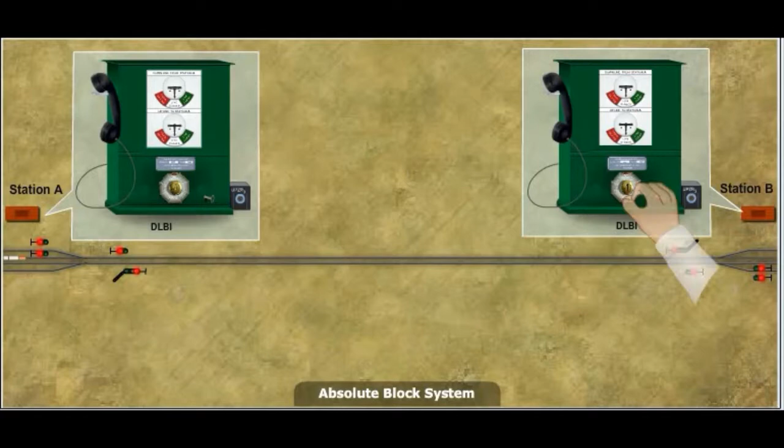Under absolute block system of working, no train shall be allowed to leave a block station unless line clear has been obtained from the block station in advance. On double line, line clear shall not be given unless the line is clear not only up to the first stop signal at which such line clear is given, but also for an adequate distance beyond it.

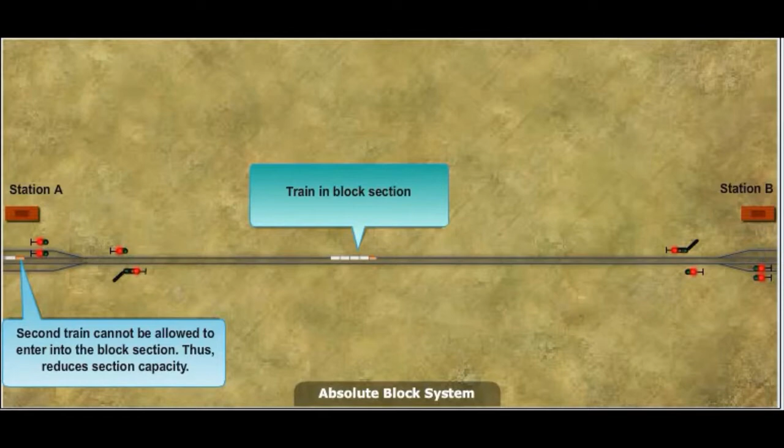In absolute block system of working, only one train can be allowed to enter into the block section. A second train can be sent only on clearance of the block section by the last preceding train. This affects the section capacity where the density of traffic is very heavy and the block section is the ruling block section, since trains take more time to clear the ruling block section.

Intermediate block signaling is a signaling arrangement on a double line section for increasing the section capacity by splitting a long double line section or ruling block section into two portions called the rear section and advance section. It is a substitute to C-class station working. So, to increase the section capacity to meet the traffic demand, the ruling block section or long block section on double line is divided into two portions with IBS arrangement. Intermediate block signaling exists only on double line sections.

Intermediate block signaling is a replacement to C-class station because of the following advantages. Block instruments are not required. Station master and operating staff are not required. Station building is not required. Section capacity is further increased.

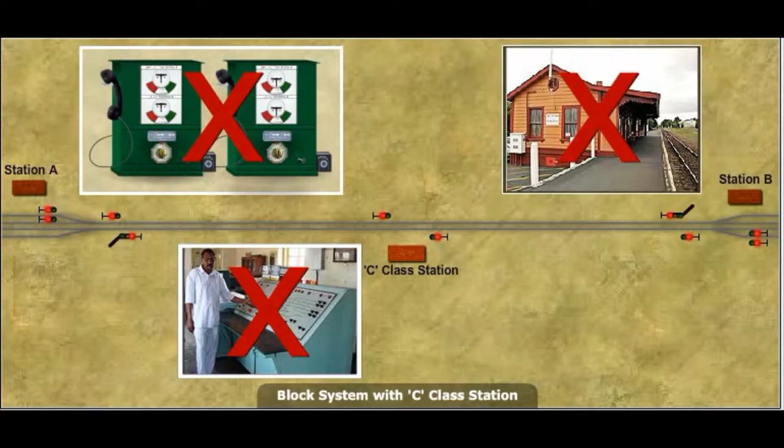IBS splits the long block section between the two stations into two sections: the rear section, also known as the axle counter section, and the advance section. With intermediate block signaling arrangement, two trains can run in the section between two adjacent stations following all the conditions required for absolute block system. The purpose of intermediate block signaling is to increase the section capacity.

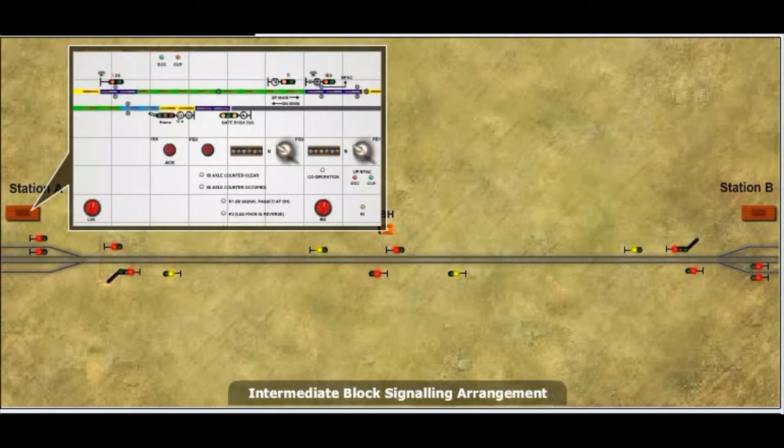Axle counters with resetting arrangement are provided for the rear section in each direction. The axle counter used may be a universal axle counter or a single section digital axle counter. Each block station has an IBS panel with various indications and push buttons. IB signal, IB distant signal and IB inner distant signal are used as per the section requirement for each up and down direction. For convenience, only one distant signal will be shown hereafter.

Each block station has a conventional double-line block instrument. IBS is interlocked with line clear obtained with this double-line block instrument in the rear station. Magneto telephone communication is provided from up and down IB signals to the respective stations at rear for communication between the loco pilot and station master in rear in case of IB signal at on for more than 5 minutes.

The rear section is the section between the last stop signal and the intermediate block signal, including 180 meters of block overlap beyond the intermediate block signal. Entry of a train into the rear section is controlled by the rear station last stop signal. The last stop signal is controlled by clearance of the axle counter section. Axle counter resetting arrangement for the rear section is kept available at the rear station in case of universal axle counter. With digital axle counter, they are available at both stations.

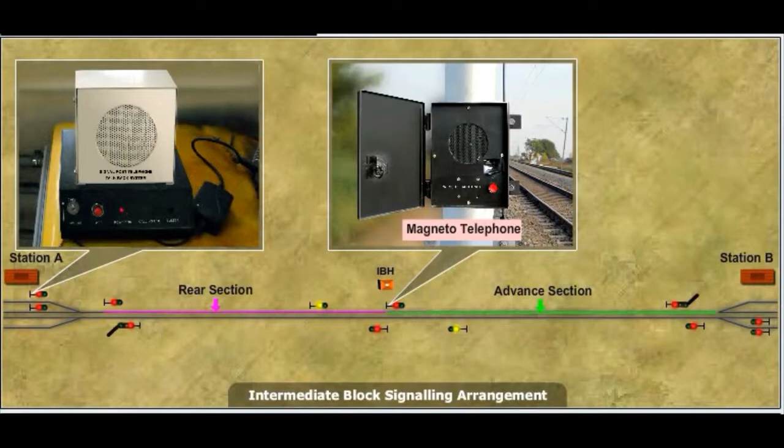Magnetotelephone is provided at intermediate block signal for communication with the station in rear in case IBS is found at danger for more than 5 minutes by the train loco pilot. The last stop signal at station A can be cleared if axle counter section is clear. In case of end cabin working, clearance of last stop signal also requires station master slide control.

Last stop signal will be replaced to on as soon as the train occupies first vehicle track circuit of last stop signal. When train goes beyond last stop signal and on occupation of LSS control track, last stop signal is replaced to on and K2 indication along with a bell will be displayed at station A operation place, either cabin or station, as a reminder to put back LSS lever or switch to normal.

The down intermediate block signal is controlled by a lever in station A or a signal switch or button on operating panel of station A, and also by the line clear received by station A from station B on the double line block instrument connected between them. On receiving line clear at station A, the intermediate block signal can be cleared. Once IBS is off, IB distant or inner distant signals also display their off aspects.

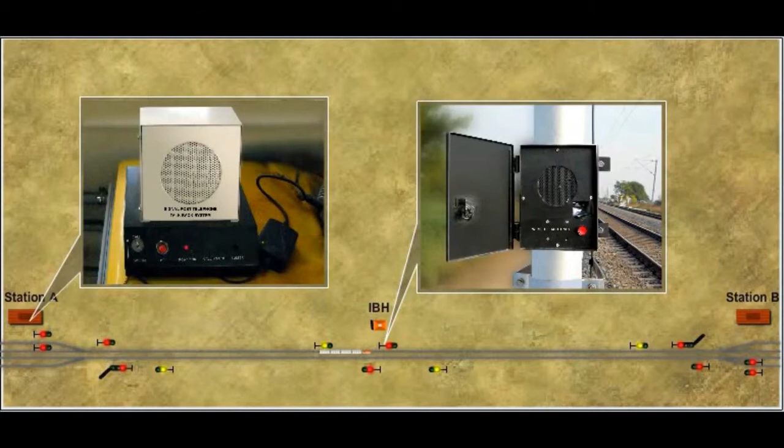Procedure to be followed by loco pilots in case of intermediate block signal at danger or blank. According to General Rules 3.75, intermediate block signal at danger or blank, the loco pilot has to wait for 5 minutes and contact on telephone provided on IB signal post with station master or operator in rear. If authorized by station A to pass the IB signal at danger on exchanging of private numbers, he can pass signal at danger and proceed to station B at normal sectional speed.

If communication is not possible after waiting for 5 minutes, he can go beyond IB signal at a speed of 15 km per hour if visibility is clear, or 8 km per hour in case of inadequate visibility, fog, night, etc. The loco pilot should proceed at restricted speed till he reaches station B and report failure to station master.

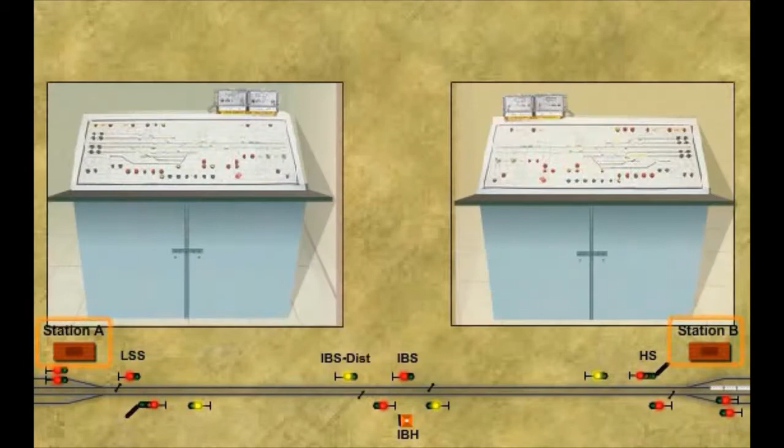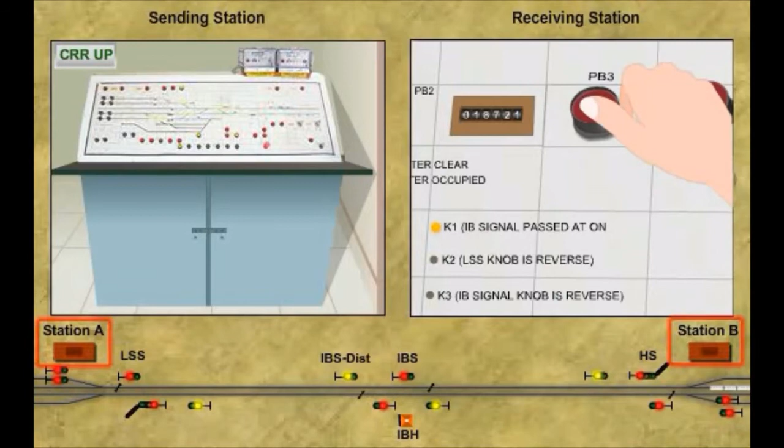Cooperation receiving relay, CRR. This relay picks up at sending station when PB3 button is pressed at the receiving station to cooperate with the sending station for cancelling either intermediate block signal passed at danger cancellation or axle counter cancellation in case of universal axle counter.

ACZNR. Train passing intermediate block signal at danger, cancellation button relay at sending station. ACZNR picks up at sending station when PB1 is pressed with ACZR down.

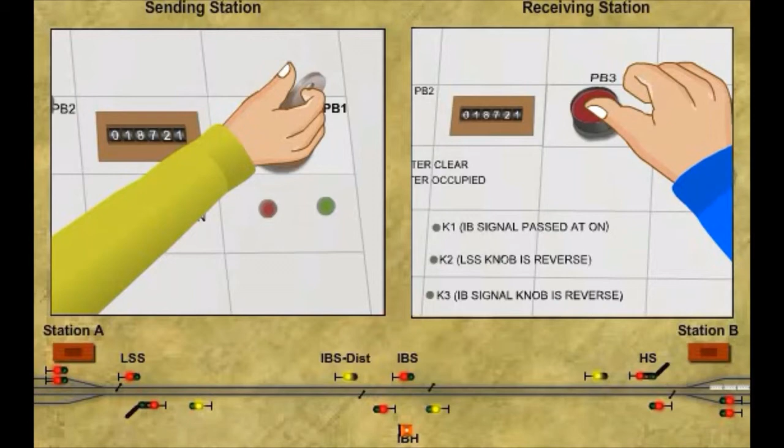Axle Counter Resetting Relay, ACRSR. This relay is used for resetting axle counter working. This relay is used with Universal Axle Counter for IBS. With SSDAC, this relay is not required. It is used whenever the axle counter shows occupation, even when there is no axle or vehicle left in the axle counter track portion.

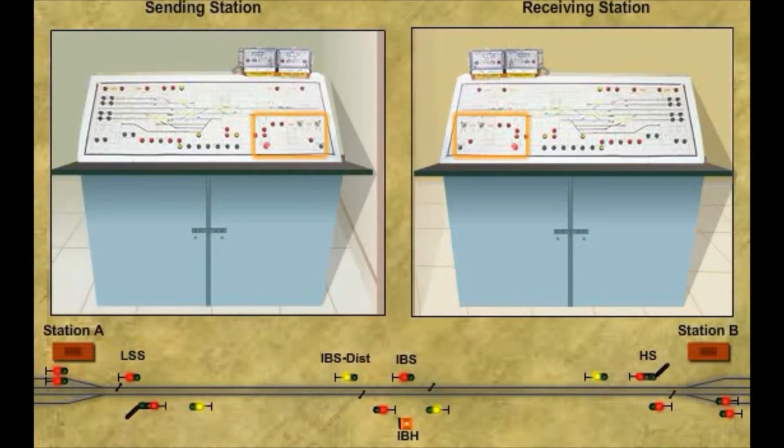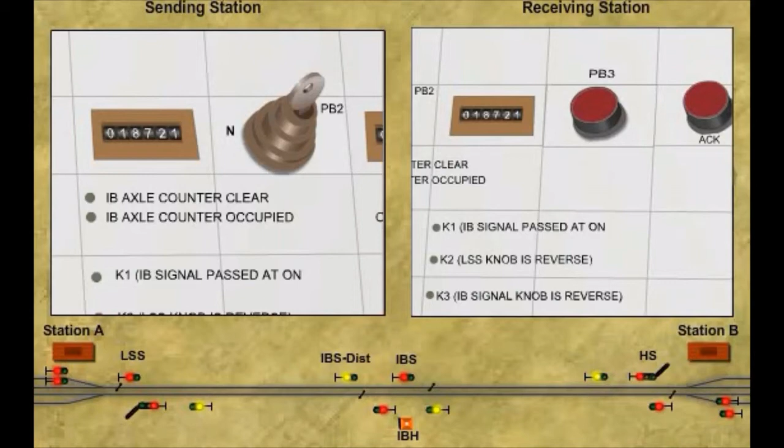It picks up when sending station presses PB2 and receiving station presses PB3 simultaneously. When ACRSR picks up, feed is extended to R relay inside the axle counter evaluator and resetting takes place.

Push button proving relay, PBPR. This relay is used for silencing the buzzer actuated when intermediate block signal is completely blank, and when intermediate block signal is passed at danger.

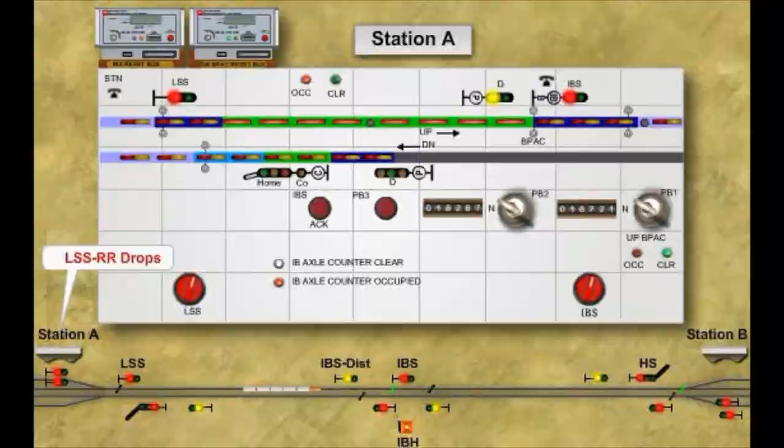LSS VPR, LSS section or rear section vital proving relay. When LSS section or rear section is clear of axles, LSS VPR relay picks up at both station A and station B. LSS VPR relay pickup is indicated by clear indication, green on the panel, and section clear indication, green on the IBS SSDAC reset box at both station A and station B.

Whenever the section is occupied, LSS VPR relay drops at both station A and station B. LSS VPR relay drop is indicated by occupied indication, red, and section occupied indication, red, on the IBS SSDAC reset box at both station A and station B.

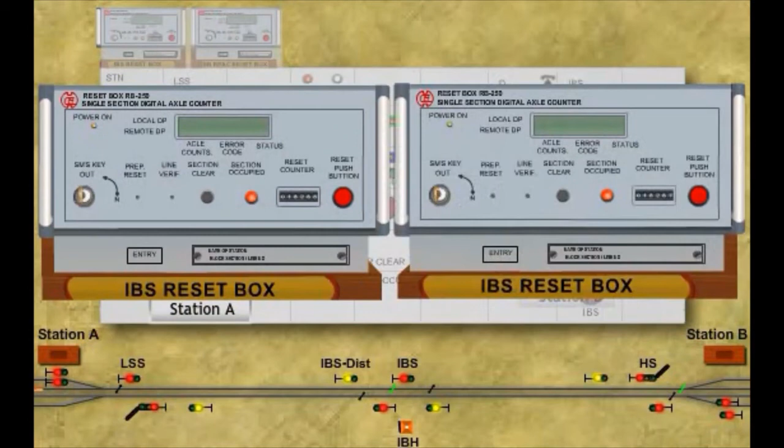LSS PPR, LSS section or rear section preparatory reset relay. This relay is normally down at station A and station B whenever the LSS section axle counter remains occupied and does not clear even when there are no axles left behind in the section. Axle counter has to be reset, and this is done by inserting SM key in the reset box, and key has to be turned along with pushing reset button.

After resetting is done by station masters at both stations, LSS PPR relay picks up after a time lapse of 12 seconds. When LSS PPR relay picks up, preparatory reset indication, yellow, appears on both SSDAC reset boxes as well as reset counter increases by 1 number.

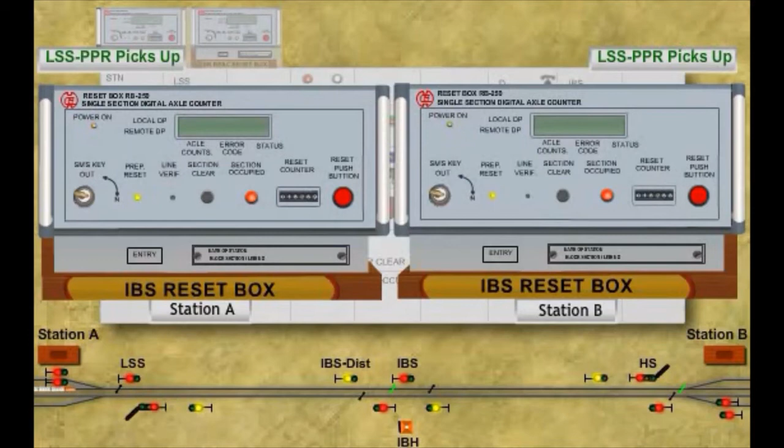Now, the next train has to be piloted out into the rear section as the axle counter was in preparatory reset mode. When this train enters and clears the rear section, LSS section, LSS VPR relay picks up and the clear indication will be displayed on the panel as well as the SSDAC box.

IBS RR, Intermediate Block Signal Switch Reverse Relay. This relay picks up when IBS switch is made reverse and the relay drops when IBS switch is made normal.

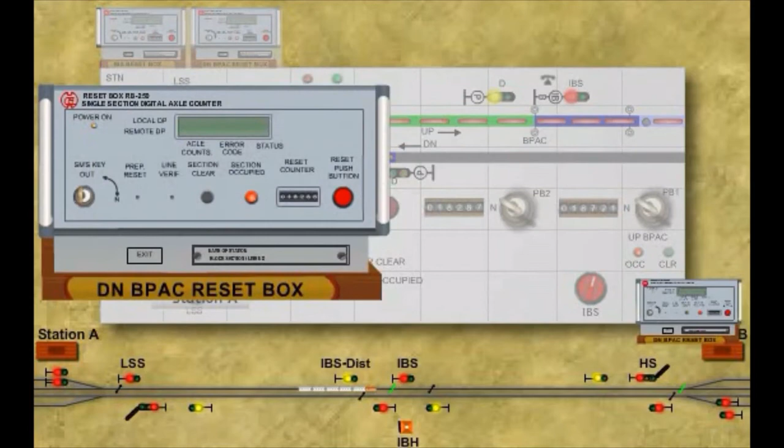IBS PPR. This relay is normally down at both station A and station B whenever the block proving axle counter section remains occupied and does not clear even when there are no axles left behind in the section. Axle counter has to be reset, and this is done by inserting SM key in the reset box, and key has to be turned along with pushing reset button.

After resetting is done by station masters at both stations, IBS PPR relay picks up after a time lapse of 12 seconds. When IBS PPR relay picks up, preparatory reset indication yellow appears on both IBS SSDAC reset box as well as reset counter increases by 1 number.

Now, the next train has to be piloted out into the advanced section as the axle counter was in preparatory reset mode. When this train enters and clears the advanced section, IBS VPR relay picks up and clear indication will be displayed on the panel as well as the IBS SSDAC box.

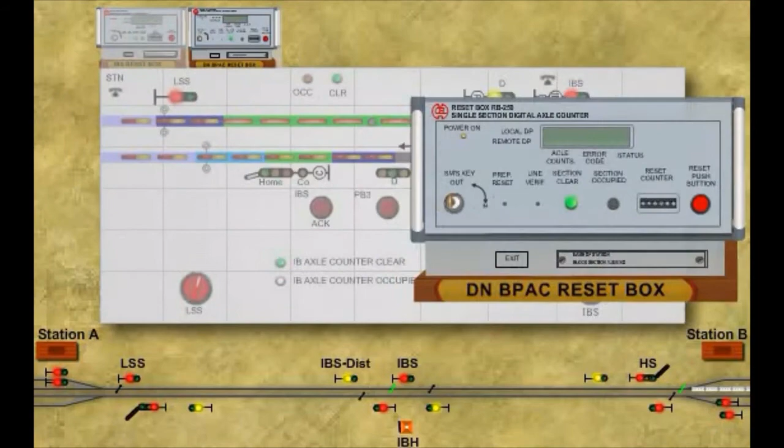Non-railway electrified area. Power supply is needed at intermediate block signal location, 230 or 110 volt AC for controlling signal lighting and 230/24 volts for controlling relays and 230/24 volts for axle counter track devices. The details of power supply arrangements for intermediate block signal include 25 mm aluminum power cable, which is laid from station A and station B to take 230 volts AC from both sides to the intermediate block signal location,

in addition to this local power or solar power supply arrangement with an auto changeover switch among these three supplies, from where it can be stepped down to 110 volts AC for signal lighting, and also used for the battery chargers for charging the batteries.

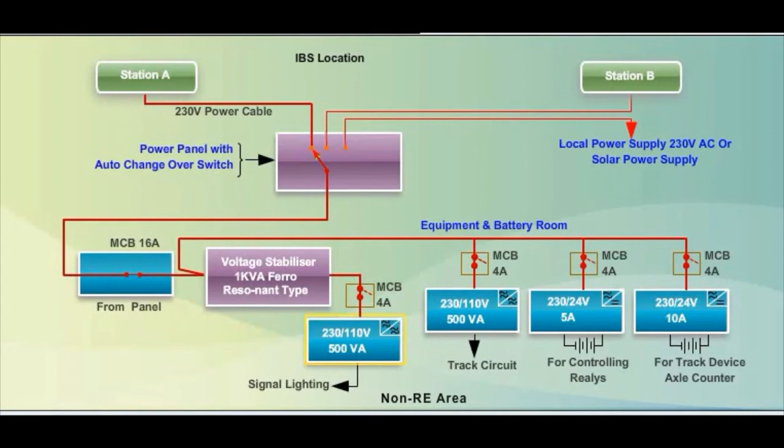Railway electrified area. The power supply 230 volts AC is tapped from the auxiliary transformers from both up and down supplies at intermediate block signal location along with local supply or solar power supply with auto changeover facility among these three supplies.

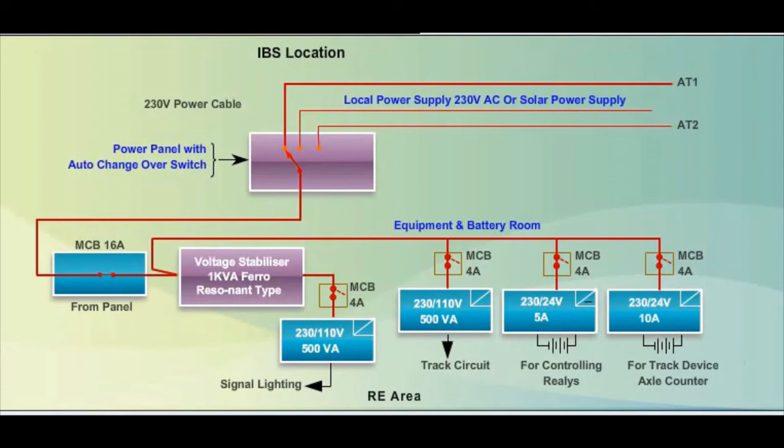The following cable requirements are needed for intermediate block signaling. Power cable. 1 PET quad for axle counter channels. 12 core cable: 2 cores for IBS DR, 6 cores for repeating relays, that is DECPR, RECPR, IBS TPR, 2 cores for cancellation buttons between station A and station B. Paper quad pair for telephone. 6 core between IB signal and distant signal. IBS distant DR relay.

LSS SR, QN1 type. This relay monitors the correct working of first vehicle track circuit, that is LSS TPR. LSS SR relay is normally in pickup condition. It drops when LSS TPR is occupied.

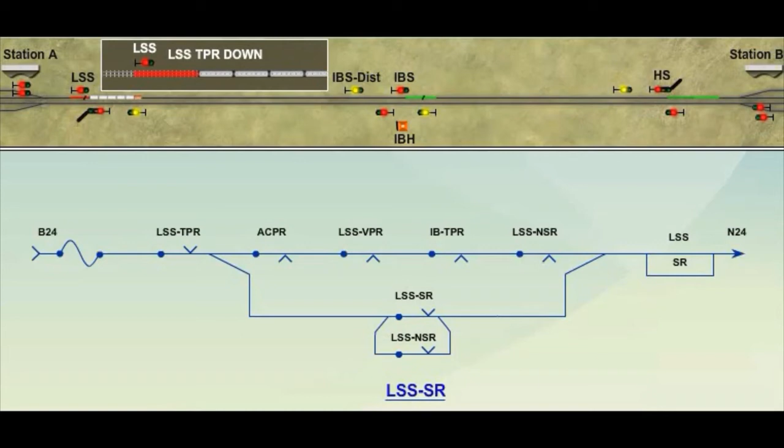Then picks up when LSS TPR is cleared and the section ahead is occupied. Once picked up, it has a stick circuit through LSS TPR up and its own front contact. LSS NSR up contact in the stick circuit will not allow this relay to drop due to track relay bobbing when the LSS is normal.

ACPR. This relay will remain in pickup condition when the rear section is free of any vehicle. This relay drops as soon as train enters into the rear section, that is, by dropping of LSS TPR relay.

And picks up when the rear section gets cleared by picking up LSS TPR, LSS SR and LSS VPR relays, and LSS controls are made normal, that is, by dropping of LSS YR, LSS DR, LSS switch relay, LSS RR.

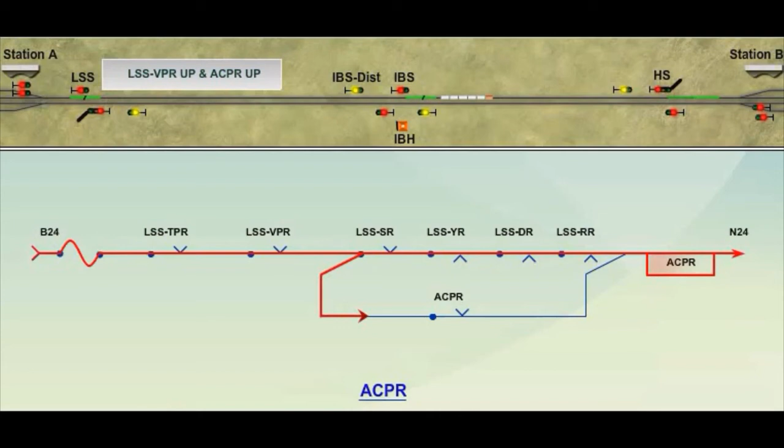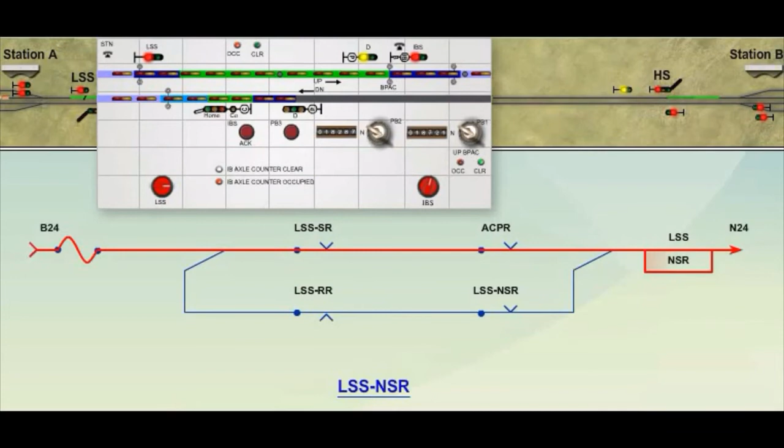LSS NSR. This relay is normally in pickup condition, proving that the track circuit and axle counter connected with rear section are clear and LSS signal controls are normal through LSS SR up and ACPR up. Drops when train enters into LSS section. When LSS signal is given, LSS RR drop will not be available, as LSS is taken off; when LSS TPR drops by the occupation of train, LSS SR up and ACPR will not be available.

It picks up when the train clears LSS TPR and the LSS axle counter section, and when signals are made normal, by LSS SR up and ACPR up. The stick path through LSS RR down and LSS NSR up when LSS is normal does not allow this relay to drop due to LSS TPR bobbing or bobbing of axle counter controlling relays for any reason. This relay proves the integrity or correct working of LSS TPR and axle counter control relays.

LSS YR. This relay picks up when both LSS and IBS controlling tracks are clear, LSS section axle counter is clear, and IBS is working properly, that is, ACZR up and HSR down. In case of end cabin working, SM slot is also included in this circuit. This relay controls LSS DR relay and thus the off aspect of last stop signal.

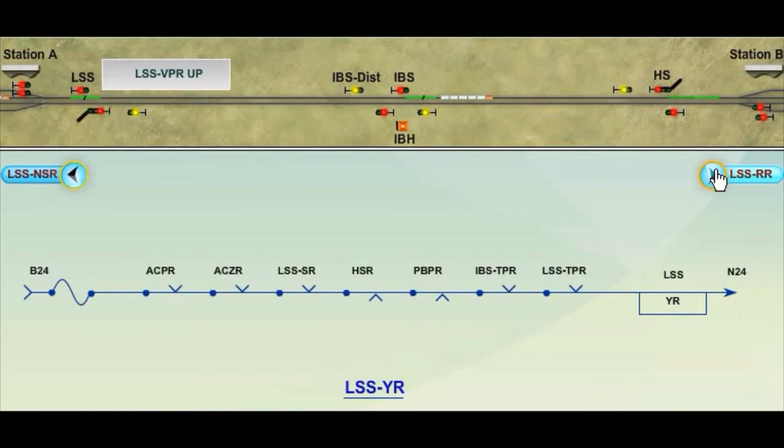LSS RR. This relay controls the last stop signal operation. This relay picks up when LSS switch is made reverse and the relay drops when LSS switch is made normal.

Once RR picks up, even if station master key is removed, that will not drop LSS-RR relay. Now, even without SM key, if LSS switch is made normal, LSS-RR does not drop. To drop LSS-RR, switch has to be made normal with SM key in.

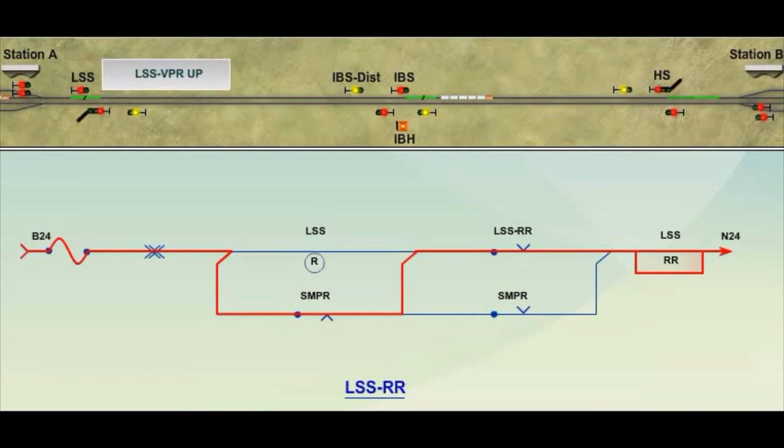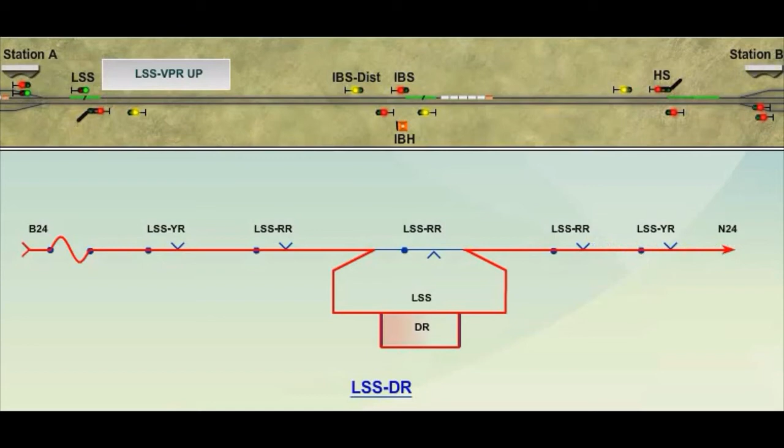LSS-DR, QN1 type. The contacts of LSS-YR are used for picking LSS-DR, ensuring the LSS control switch lever is reversed. LSS-DR controls the feed to the LSS signal.

IBS-RR. This IBS switch reverse relay controls the IB signal operation. This relay picks up when IBS switch is made reverse and the relay drops when IBS switch is made normal.

Once RR picks up, even if station master key is removed, IBS-RR relay will not drop. Now, even without SM key, if IBS switch is made normal, IBS-RR relay does not drop. To drop IBS-RR with SM key in, IBS switch has to be made normal.

IBS-DR, QN1 type. IB signal green aspect controlling relay picks up when line clear, that is, LCPR is received, along with other controls. Normally, when the double line block instruments are in line closed condition, ASR1 and ASR2 relays are in pickup condition, proving that earlier line clear granted was used, that is, the instrument after entry of train into the block section was turned to train on line condition and got locked.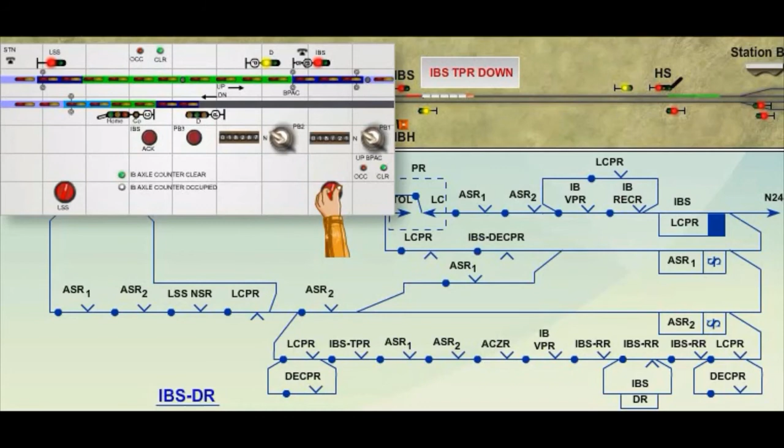Train entering signal, that is, 3 bell beats, will be exchanged between station A and station B. Station B turns double line block instrument handle to train on line and gets locked in train on line position. At station A, PR relay train on line contact makes.

ASR1 and ASR2 relays pickup proves train is completely inside the block section. That is, IBS-TPR up, IB signal is normal. That is, IBS-DR, IBS-DECPR relays down, and IBS-RR relay down. Granted line clear was consumed. That is, block handle at other station is locked and LCPR is down. Unless proper sequence is followed in closing the block section, clearance of IBS signal is not possible.

Even when PR train on line contact breaks, ASR1 and ASR2 have their own stick circuit, through IBS-TPR up and the second path through LSS-NSR up, LCPR down. The path does not allow ASR1 and ASR2 to drop even when IBS-TPR bobs.

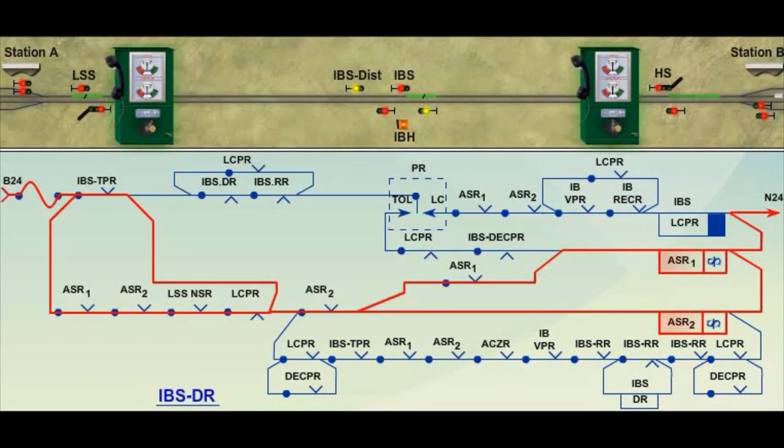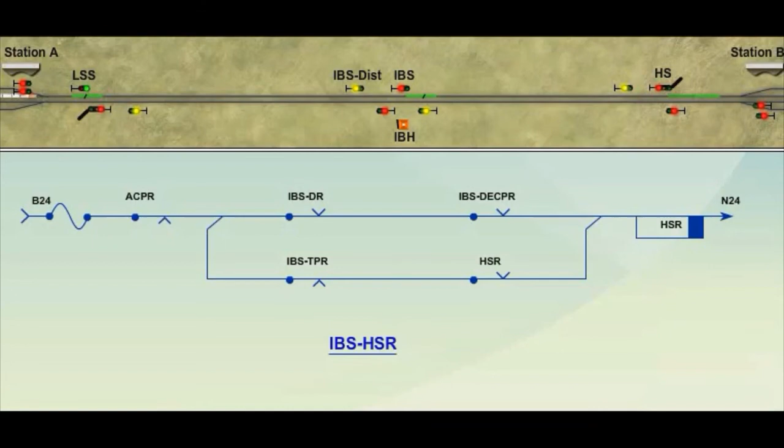IBS HSR. This relay is normally de-energized. It will pick up when IB signal is given, IBS-DR up and IBS-DECPR up, to a train on approach to IBS, ACPR down. It will be in pickup position even when train passes on IBS track circuit, and drops when train clears IBS track circuit.

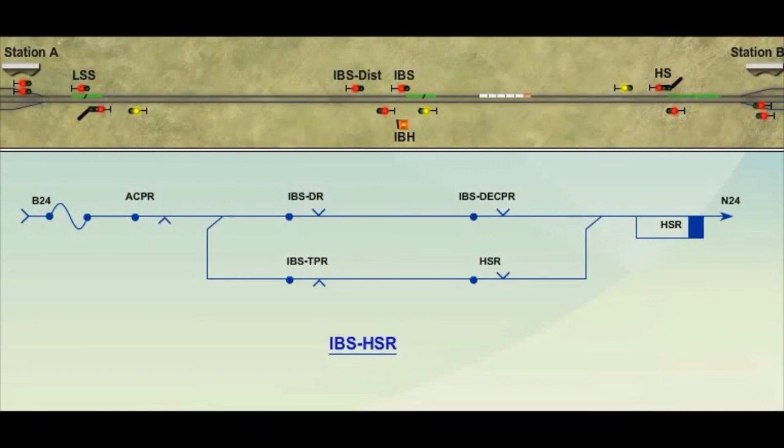This relay keeps the information that IBS is working normally and helps to maintain ACZR relay up. When a train passes IBS at danger, this relay does not pick up and makes ACZR drop to register this abnormal condition.

ACZR. This relay is normally in pickup condition. This relay feed is taken through 3 paths, and when a train passes IBS with off condition, at least one of these three paths is available and ACZR is in pickup condition.

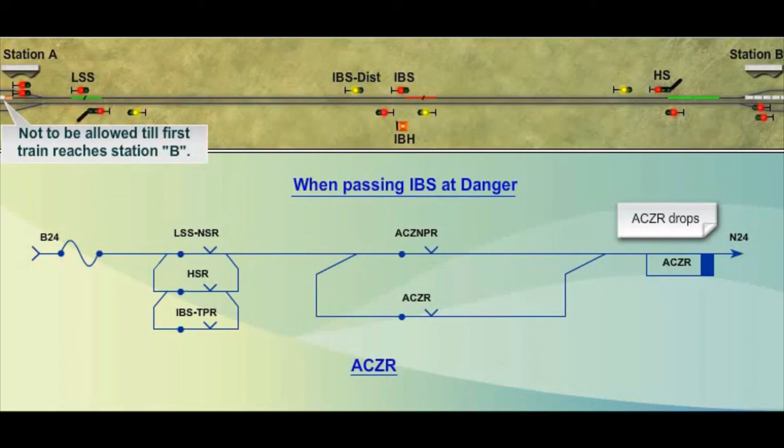As long as ACZR relay is down, LSS as well as IBS cannot be cleared. In this case, LSS section and IBS section should be treated as only one section and trains to be piloted accordingly.

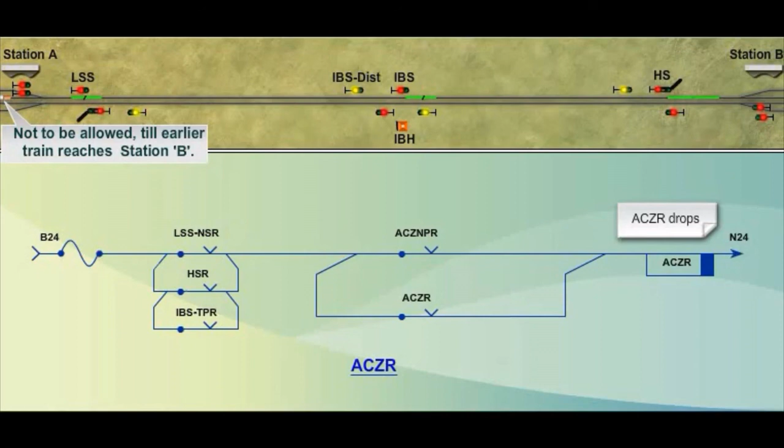After IBS signal rectification, signal passing IBS condition has to be reset with the cooperation of both station masters. Then ACZNPR picks up and circuit for ACZR will be completed and ACZR relay picks up. Now normal working of IBS will be restored. CRR. This relay picks up at sending station when PB3 pressed at receiving station for cooperation of either axle counter cancellation or IB signal passed at danger cancellation.

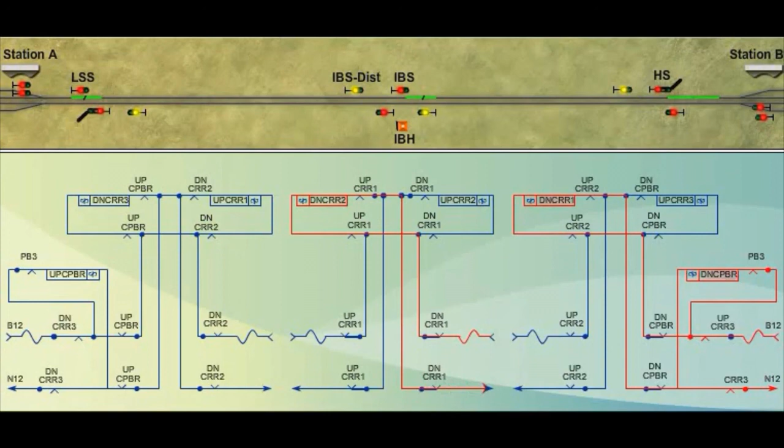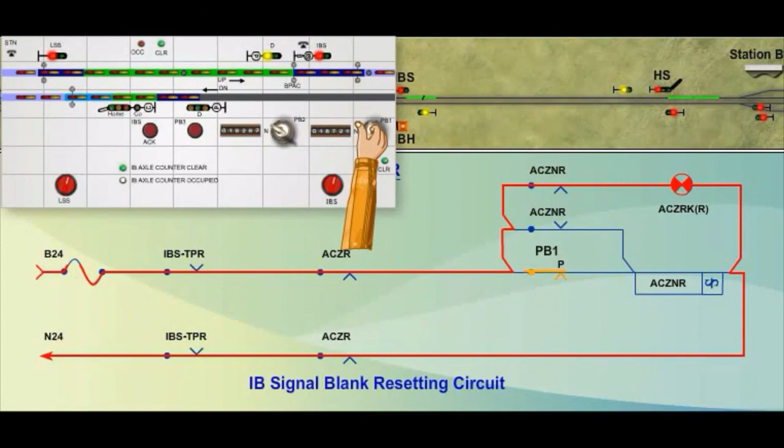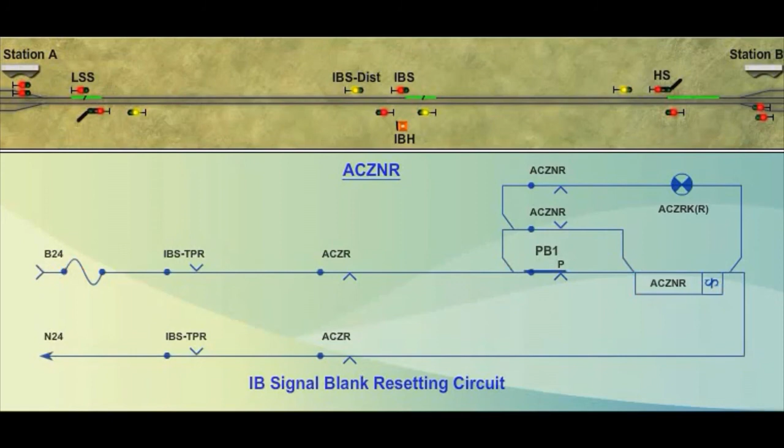ACZNR and ACZNPR. Train passing IB signal at danger, cancellation relay ACZNR picks up. And PB1 at sending station is pressed. ACZNPR picks up with ACZNR up, PB1 pressed at sending station and CRR up, that is PB3 pressed at receiving station.

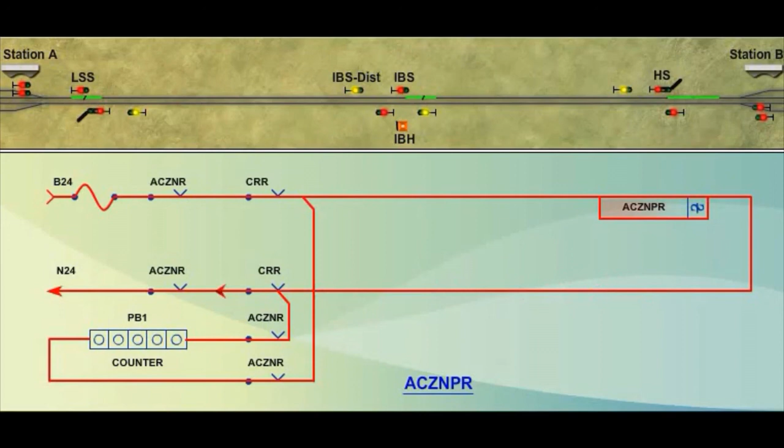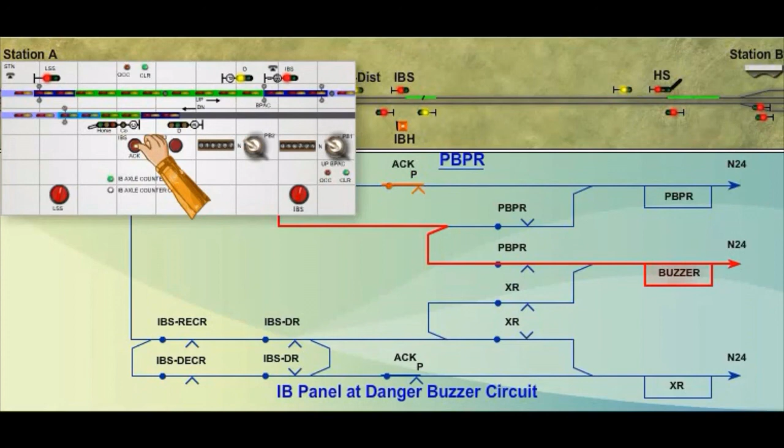PBPR and XR. This relay is used for silencing the buzzer. 1. IB signal passed at danger. When train passes IB signal at danger, buzzer gets activated through PBPR drop contact. When PBPR relay up, buzzer stops. PBPR relay will drop when IB signal passed at danger failure is rectified and reset operation is done by ACZR relay pickup.

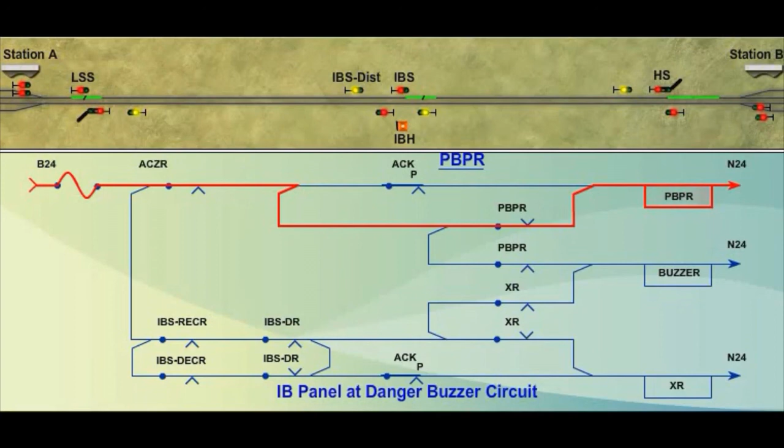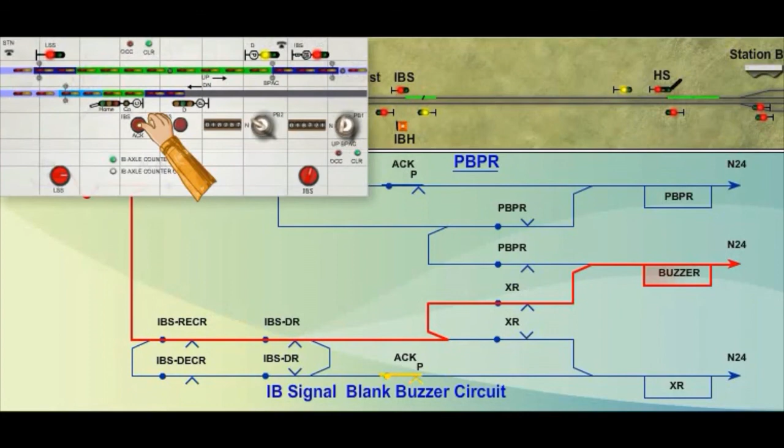2. IB signal is completely blank. When IB signal is not off, red aspect is to be displayed. If for any reason red aspect is not lit, IBS RECR drops. This will complete the path through XR drop contact for buzzer. When this failure is acknowledged, XR relay picks up and buzzer stops. XR relay has stick path as long as failure continues. When failure is rectified, XR relay drops.

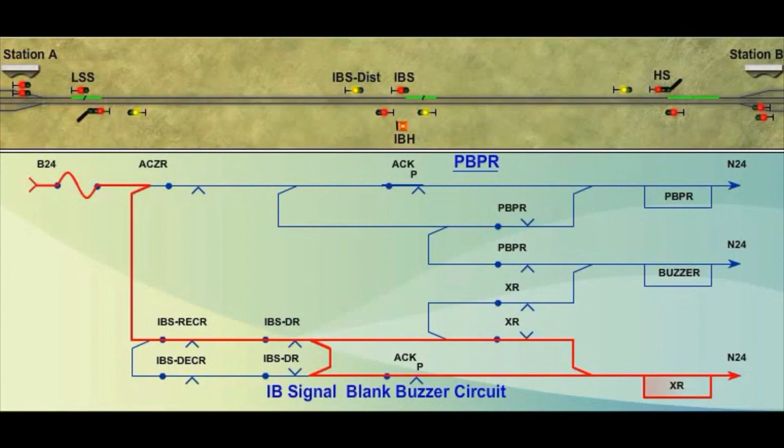Similarly, when IBS DR is up but green aspect is not lit, IBS DECR will not pick up. This condition also actuates this buzzer with XR drop contact. Indication. K1 indication. When IB signal is passed at danger, ACZR relay drops and K1 indication appears along with a buzzer. K2 indication.

When LSS is taken off and train enters into the LSS section, ACPR relay drops and LSS switch is still reverse. K2 indication appears along with a bell to remind the SM to normalize the LSS switch. K3 indication. When IBS signal is taken off and train enters into the IBS section, ASR1 and ASR2 drop, and if IBS signal switch is still in reverse, K3 indication appears along with a bell to remind the SM to turn the IBS signal switch to normal.

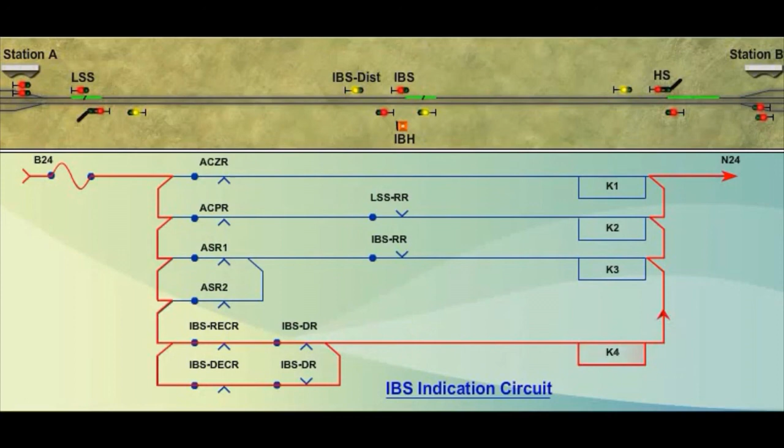K4 indication. Whenever IBS signal is blank, K4 indication appears along with a buzzer. 1. When IBS signal is on and IBS RECR is dropped. 2. LSS is off. 1. LSS at danger. 2. LSS is off.

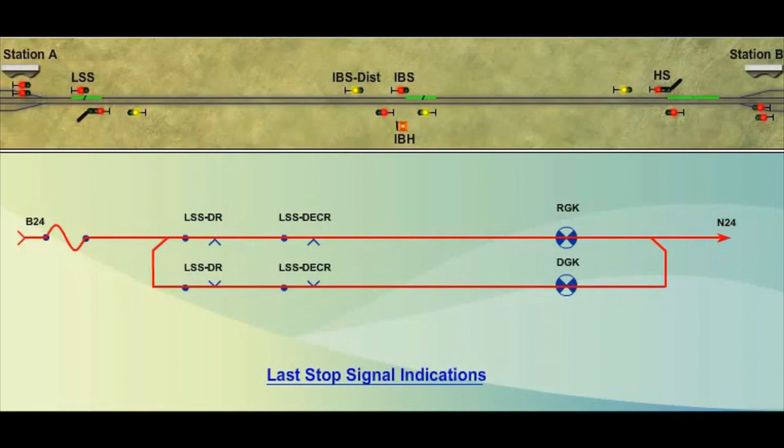Preparatory resetting circuit with SSDAC for LSS section and IB section with BPAC. The LSS section axle counter system has been provided with preparatory reset feature. In case of failure, reset is to be applied by both station masters and the system comes to a preparatory state. One train is to be piloted in the section for system to become clear and normal. Procedure for piloting should be followed as per station working rules, SWR in railways.

Vital relay, VR, and preparatory relay, PR, are provided in the relay box installed at SSDAC system location box. VPR and PPR are their repeater relays. Preparatory resetting relays PR and PPR are normally down relays, and vital relays, which prove that the axle counter section is clear, that is, VR and VPR, are normally up relays. When the axle counter system is failed, VR and VPR relays drop. Through VPR back contact, occupation indication appears on the reset box and red indication appears on the indication panel.

SM's resetting operation from both the stations is required with or without time gap in LSS section SSDAC system. To perform this, insert SM's key, turn right, keep pressed and press reset button. With this operation, the 48 volts DC from the reset box is extended and connected to the SSDAC through the drop contacts of PPR and VPR relays in relay room. This 48 volts DC activates the reset circuit and modem card of SSDAC unit and generates reset commands to the microcontroller cards of SSDAC unit.

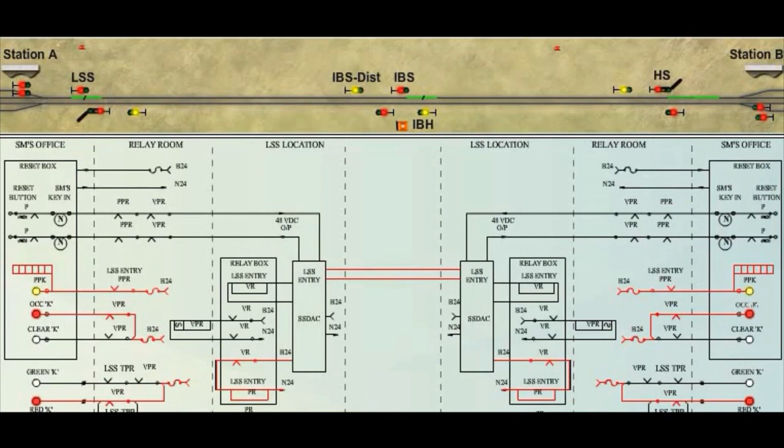Then, the SSDAC units are reset and counts become 0. The self-test is carried out in both the units. After a gap of 5 seconds approx, the SSDAC units attain the preparatory reset state. The PR and PPR relays pick up, and the preparatory reset LED indication, yellow, glows on the reset box in station master's room and the counter reading also increments by 1 count. In this preparatory mode of SSDAC, one pilot train is to be passed in the section to make the system normal.

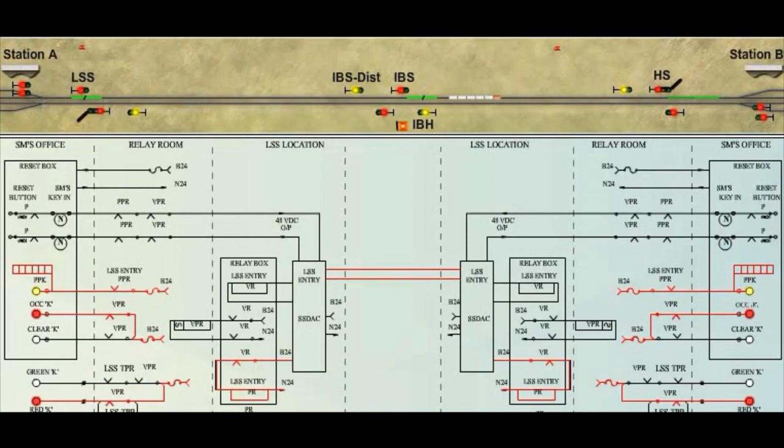When a train passes in preparatory mode, then VR and VPR relays pick up and PR and PPR relays drop at both the stations. When PR and PPR relays drop, yellow indication extinguishes, and through VPR front contact, clear indication appears on the reset box and green indication appears on the indication panel.